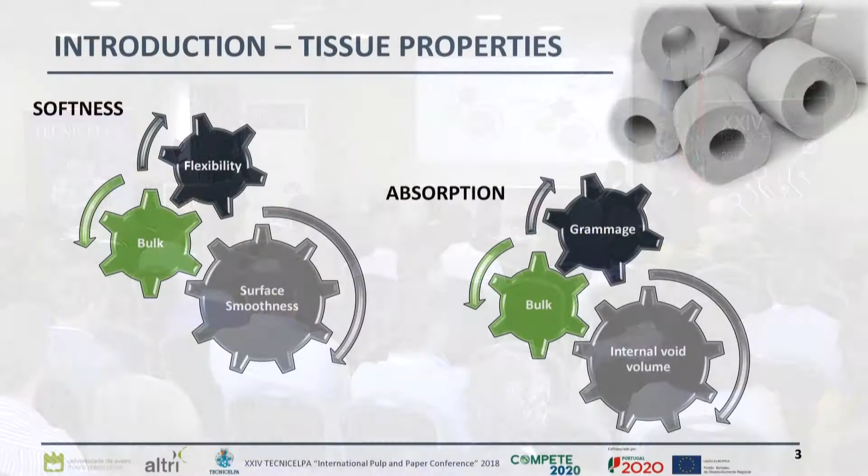Looking at these numbers, pulp industries are now pressed to improve and optimize their production processes in an economical, viable, and technologically feasible way. As a competitive area, the tissue market requires pulps with distinguished specifications, especially as regards absorption capacity and organoleptic properties such as softness. Softness is generally recognized as being comprised of two components, bulk and surface softness.

Surface softness is related to the smoothness, texture, and surface uniformity, and so it is very sensitive to protruding fibers or irregularities at the surface. Absorption capacity refers to the ability to absorb and retain water quickly, which is mainly dependent on the capacity to form hydrogen bonds by the surface hydroxyl groups of cellulose. It's directly impacted by sheet grammage, bulk, and internal void volume, as each void is a potential storage space for a liquid.

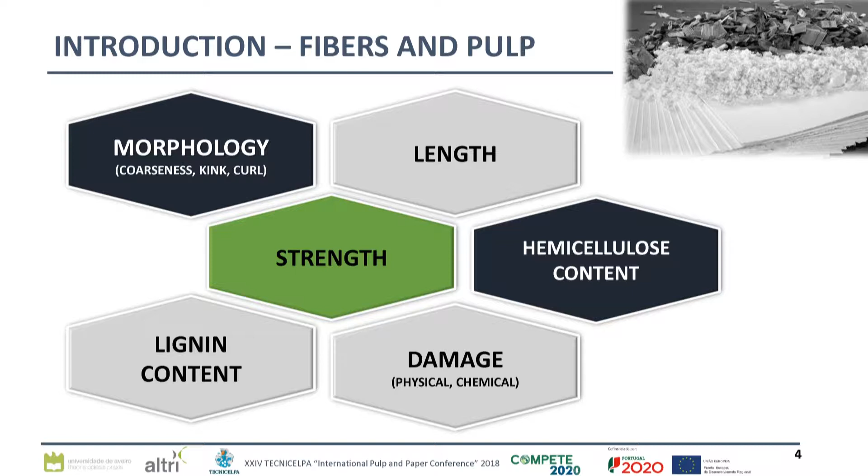Length, strength, lignin content, and physical and chemical damage of fibers are four wood characteristics known to have a strong impact on the tissue properties considered. Tissue producers also desire pulps with moderate intrinsic viscosity and low hemicellulose content. Low hemicellulose gives paper with a lower degree of hydration and is recognized as being one of the most important parameters in this case study. Coarseness, curl, and kink are three key morphological characteristics also known to have a strong impact on softness and absorption capacity.

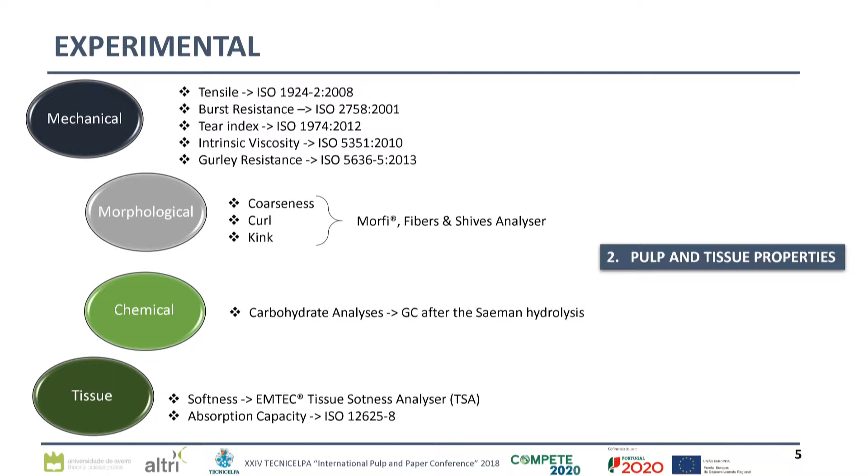So, in this work, aiming to evaluate the impact of some production factors on these two final tissue properties, a series of industrial pulps were first selected using multivariate statistics in order to ensure that the final properties would be significantly different. After this, the mechanical properties, morphological aspects, and chemical composition of these pulps were determined according to standard methods, and the softness and absorption capacity were determined using the EMTEC tissue softness analyzer, and the absorption capacity according to the ISO standard. Here it's important to note that softness and absorption capacity were determined by preparing laboratory handsheets, mimicking tissue papers of low grammage, approximately 20 grams per square meter.

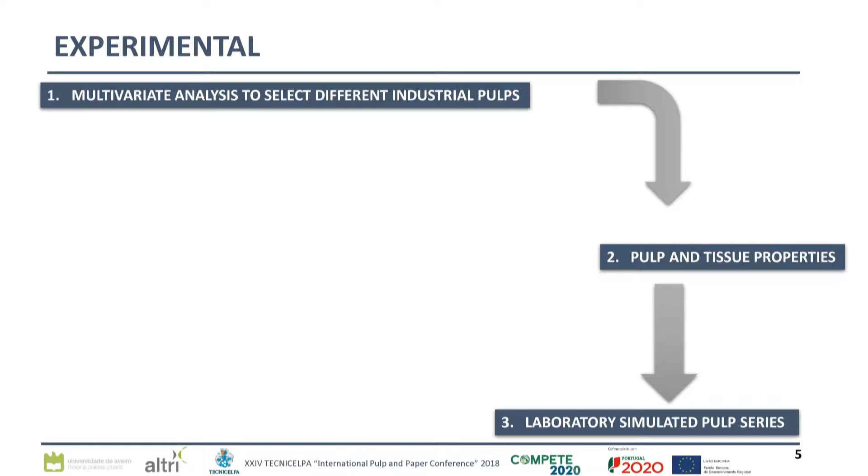After this, in order to confirm the relationships found for industrial pulps by multivariate statistics, some laboratory work was done, which comprised a cook and bleaching step. Eucalyptus wood chips were cooked in a dual vessel MK digester at a temperature of 160 degrees for 2 hours with similar sulfidity and hydromodulus 4, and for a range of different active alkali charges.

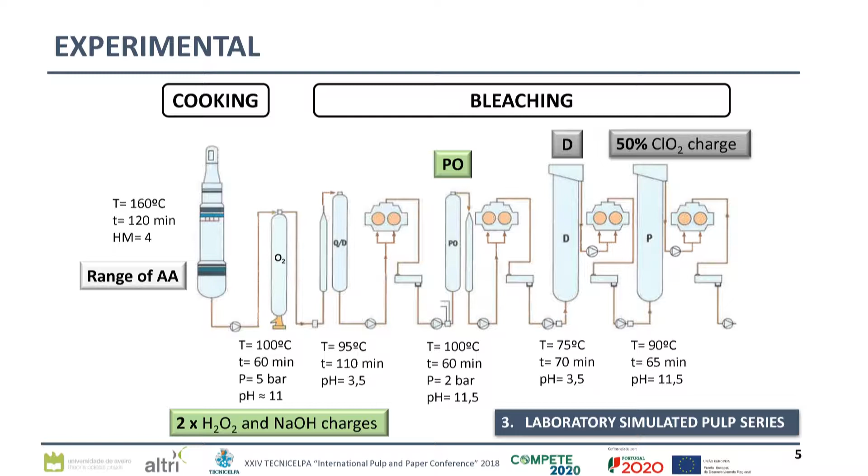Unbleached pulps were then submitted to oxygen delignification followed by 4 bleaching stages, 2 of them using chlorine dioxide, 1 with hydrogen peroxide and oxygen, and a final bleaching stage only with hydrogen peroxide. The modifications in bleaching sequences comprised an increase of 100% of hydrogen peroxide and sodium hydroxide charges in the PO stage, and another with an increase of 50% in chlorine dioxide charge in the final D stage.

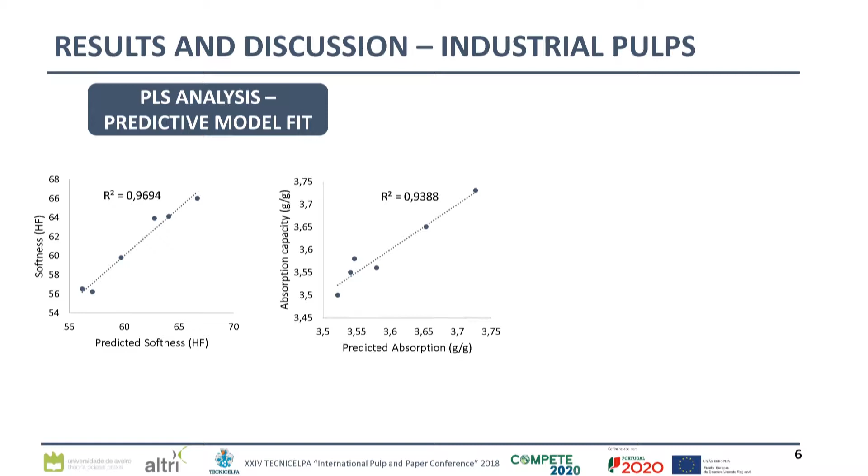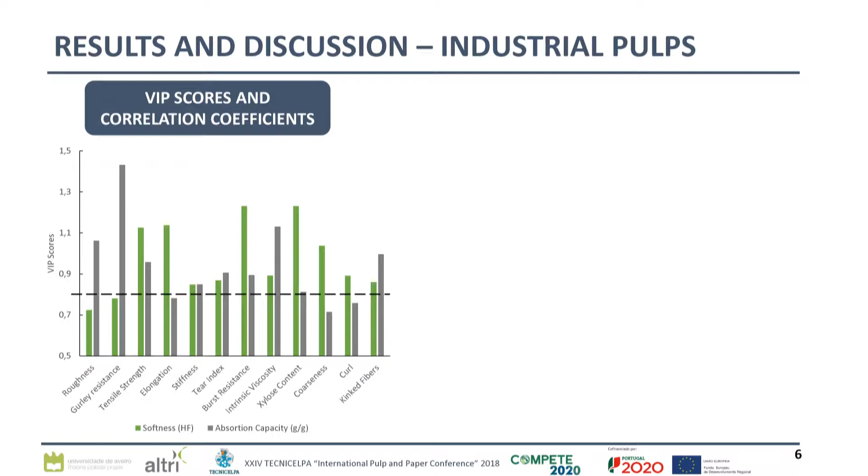A partial least squares analysis was performed in order to explain the maximum covariance of a matrix A containing softness and absorption capacity values by a matrix B containing the mechanical properties and the morphological aspects. As we see, trustworthy results were found because the decomposition of matrix B was then used to predict new values of A, and as shown, we obtain a correlation coefficient above 0.9 for the prediction of softness and absorption capacities. Generally, variable importance scores under 0.8 are considered low, which means that these variables don't have a strong impact on the prediction of new values of softness and absorption capacities.

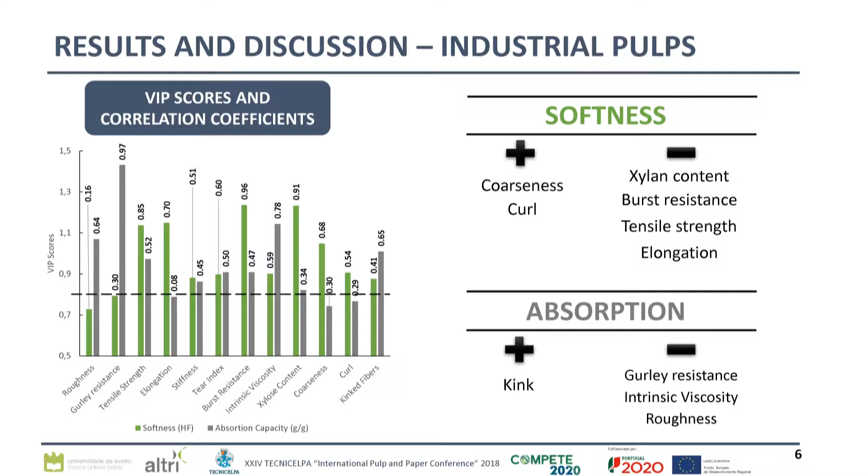Hence, the prediction of softness showed a negative correlation with the xylan content, with a correlation coefficient of 0.91, a negative correlation also with burst resistance, tensile strength, and elongation, and at the same time was positively correlated with coarseness and curl of fibers. Absorption capacity showed a negative correlation with the Gurley resistance, with a high correlation coefficient of 0.97, and a negative correlation with intrinsic viscosity and surface roughness. These tissue properties show a positive correlation with the kink index of fibers.

For laboratory-produced pulps, in general, the correlations found between tissue and pulp mechanical properties corroborated the conclusions drawn before by statistical analysis of industrial pulps, but a strong relation was also found between stiffness and softness, and between stiffness and absorption capacity. As stiffness is associated with the intensity of interfiber bonds, this negative correlation seems coherent, and for absorption capacity, for the same reason, softness was decreasing. As could be expected from these two trends, a positive correlation between softness and absorption capacity was confirmed with a correlation coefficient of 0.71.

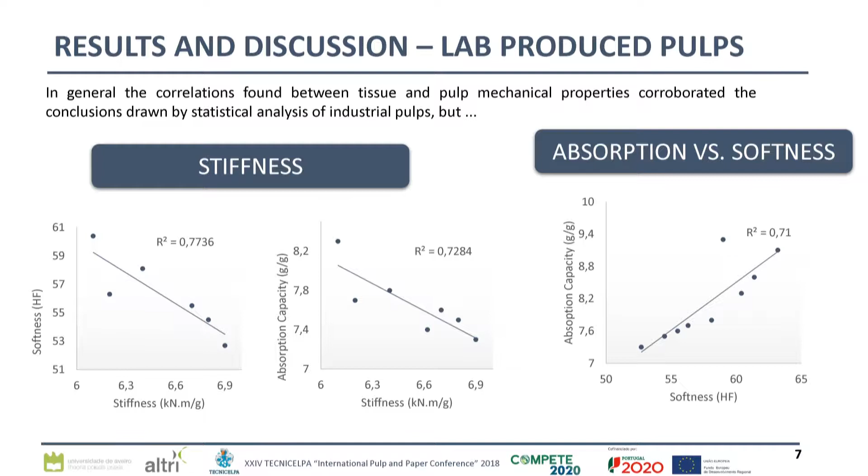Fixing the bleaching sequence, an increase of cooking severity led to a gain of almost 6 HF units in softness, with similar absorption capacities, which was accompanied by a maximum loss of 5.3% yield, a decrease of 2.4% in xylose content, substantial loss of intrinsic viscosity values, and lower hemicellulose content.

Fixing the cooking severity, modifying the bleaching sequence affected negatively both softness and absorption capacity. When compared to standard bleaching, for each cooking severity, softness dropped 3 to 5 HF units in modified PO and 5 to 6 HF units in modified D. Lower absorption capacities were found, as well as lower mechanical properties, with the modified PO stage being the one with the highest negative impact on the mechanical properties.

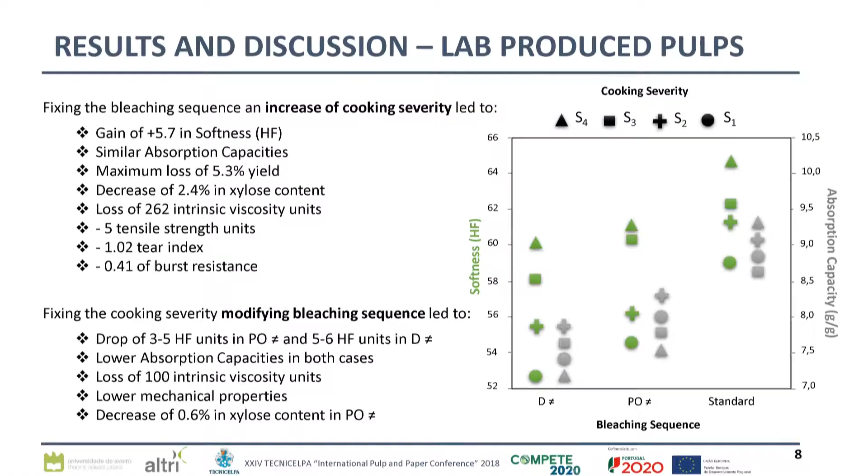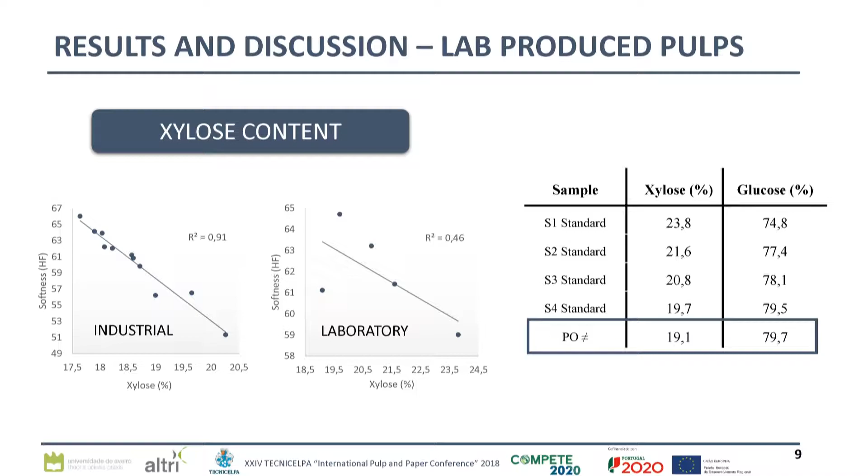This decrease of 0.6% in xylose content we'll talk about in the next slide. In relation with xylose content, and taking into consideration the correlations found before for both industrial and laboratory-produced pulps, the intention of modifying the PO stage was related to a better purification of the fiber surface and with the purpose to remove hemicelluloses extensively. However, although the xylose percentage in modified PO effectively decreased, no improvement in softness was detected.

In short, with this work we conclude that eucalyptus bleached kraft pulps have a significant effect on these tissue properties. Softness of ECF pulps was negatively influenced by xylan content and pulp strength properties. Absorption capacity showed high negative correlation with Gurley resistance, surface roughness, and intrinsic viscosity of industrial pulps. The relationships found for laboratory-produced pulps corroborated the conclusions drawn from industrial ones, and also showed a clear trend of softness and absorption to increase with the decreasing of handsheet stiffness.

Severity of laboratory cook revealed an increase of softness and similar absorption values. Pulps showing better softness also revealed better absorption. Increase of reagent charges in the bleaching stage affected negatively both softness and absorption values. And last but not least, xylan removal or polysaccharides degradation in pulping and bleaching operations leads to a different effect on softness and absorption capacity.

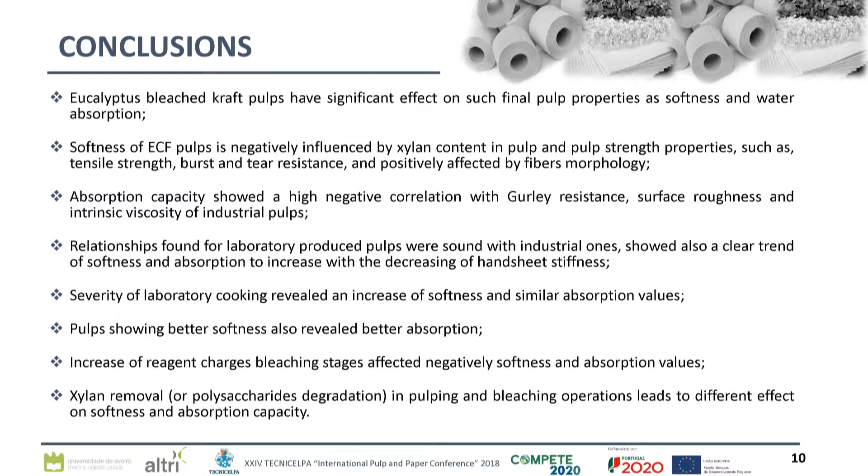I'm very glad to be back in Portugal. Even though I'm based in Sweden, I have traveled quite extensively in Portugal previously. It's a lovely country, really. And in fact, my first business trip went to Portugal in 1987 when we introduced the first Kappa number analyzer.

I will do this presentation together with my colleague, Renato, from our branch in Brazil. I would also like to thank Mr. Andreas Wikström from SCA Obbola Mill, where this example is taken from. He has also contributed to the paper.

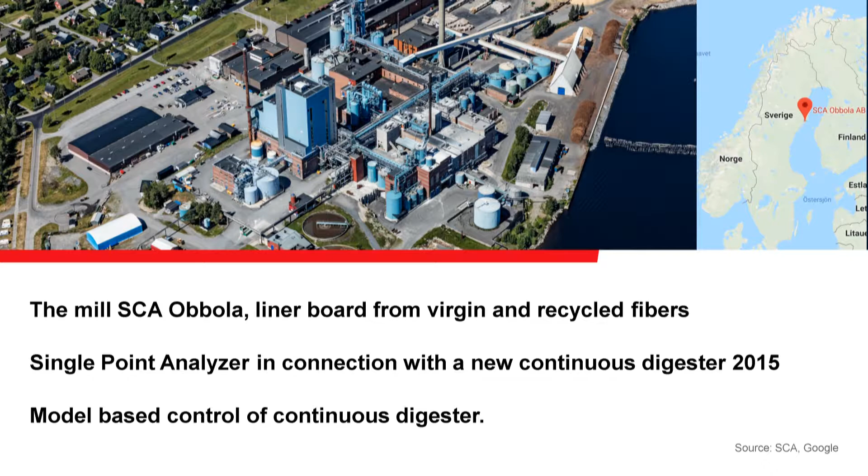So SCA Obbola Mill is based in the northern part of Sweden, close to the coast. The nearest city is Umeå. And it's a high-yield mill. They make linerboard, with a Kappa number target around 80. And they invested in a new continuous digester in 2015 from a Swedish supplier. And the second part of the paper, which Renato will do, is about the possibilities of even further increasing the yield and the pulp quality using model-based advanced process control.

So this mill had a batch digester plant, built in the 1960s. In 2015, they tore down the old batch plant, and they put in a new continuous digester. They produce around 260,000 tons yearly, but the nominal capacity is much more. The reason for that deviation is that they are preparing for a new investment, a new board machine, and the extra capacity will be utilized. So they are producing virgin pulp. They are also producing recycled pulp for the liner.

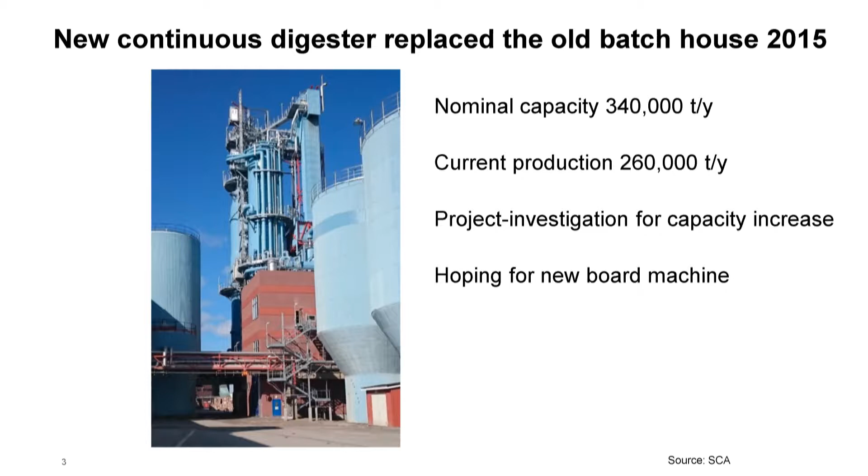So now I will start to talk about the first challenge in this project, control-wise, and that was to even be able to measure the kappa number. Because you have the new continuous digester from a Swedish supplier. It is equipped with a control system, H-factor supervisory-based control. And what they lacked to stabilize the kappa number and to increase the yield was a continuous kappa number measurement close to the digester. Because you need that feedback signal in order to control the continuous digester to the desired kappa number.

The challenge in this case was that the refiner is located far away downstream. So it's a matter of more than an hour between the refiner and the digester. And the challenge was to try to minimize that time.

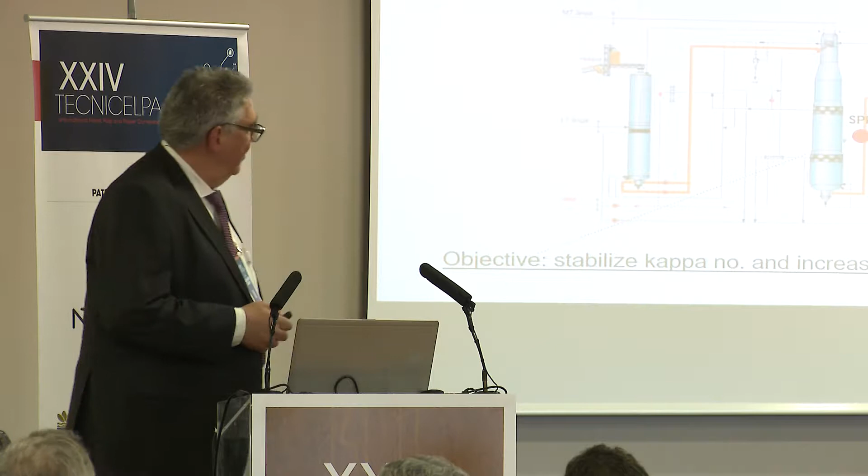And the only possibility was to put the analyzer, the automatic kappa number analyzer, in the blow line. And one has to remember at this point, the pulp is not really defibrated. It's more chips than pulp. So that was the challenge.

So this is taken from the internal screen system that is integrated in the analyzer. You can see the reject from the analyzer and the accept. And since all automatic kappa number analyzers are based on optical features, the absorption of ultraviolet light, it means that we cannot measure on big pieces of chips. We need free fibers. And the amount of free fibers is very small compared to the reject. So that was really the challenge.

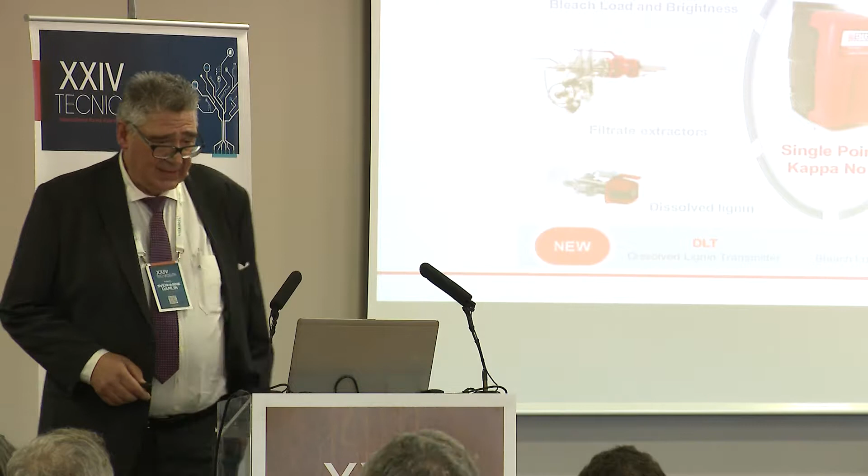And what we used was this SPK, the single point kappa number analyzer. It's measuring the fiber kappa. It can also measure hexenuronic acids, and you also get a fiber length index. It's a part of a new family of tools that we have to control and optimize the fiber line. So we use this one on the brown side, digester and oxygen stage. We are using other tools in the bleach plant where we can measure all lignin in the fiber line: fiber-based lignin, filtrate-based dissolved lignin, COD, in order to optimize a complete fiber line. In this case, there was no bleach plant, so only this one was needed.

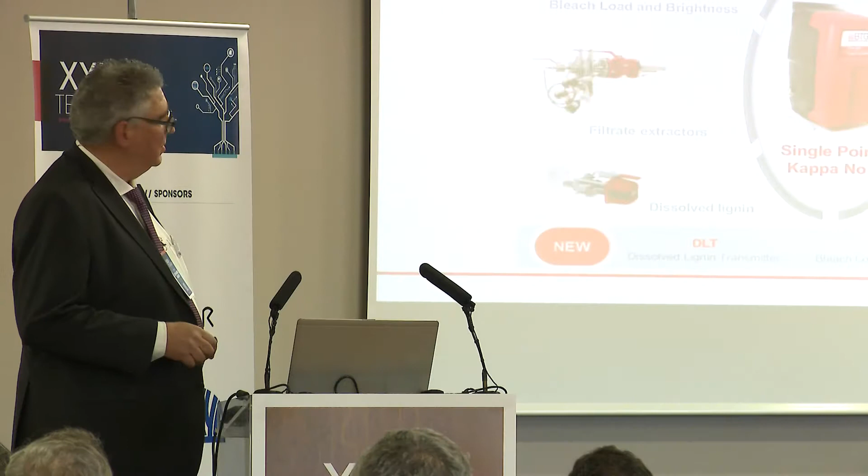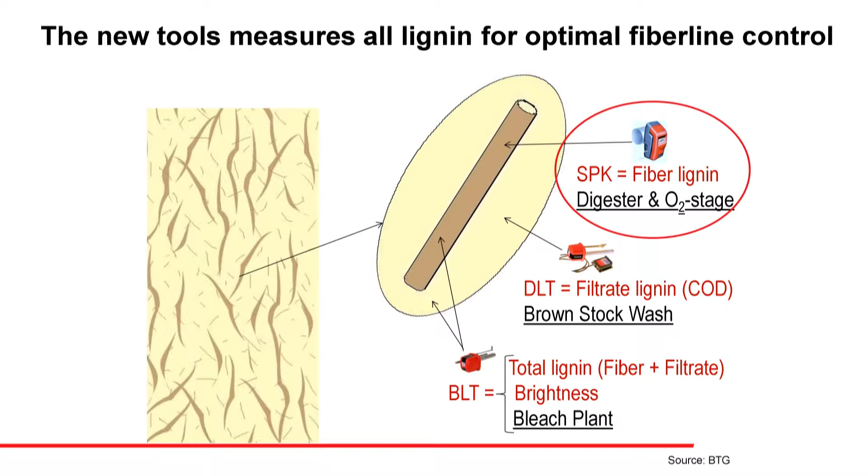So this is how it looks. We are using the single point kappa number analyzer to measure the lignin content of the fiber. We have other tools to measure the dissolved lignin in the filtrate, and also the total kappa number, fiber plus filtrate, together with brightness. That is used to optimize a brown stock wash and to optimize a bleach plant. But in this case, what we used was this tool, measuring the lignin content of the fiber.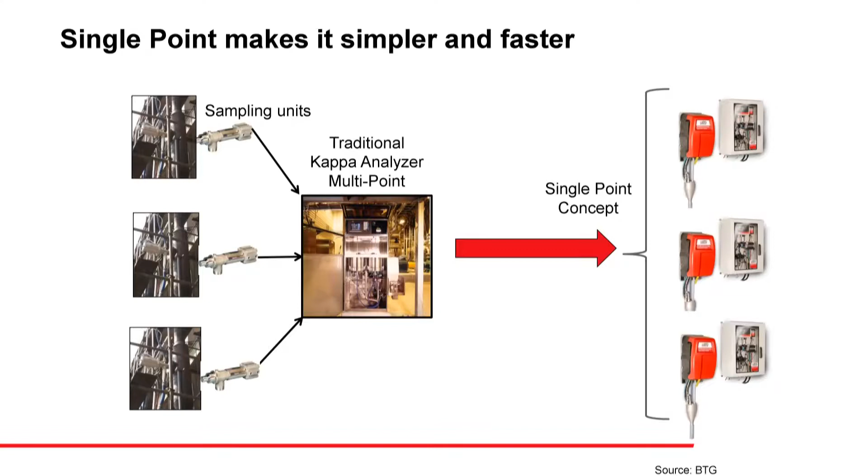So we went from this technology. This was the one that I mentioned I was introducing back in 1987, the first automatic kappa number analyzer. It's a central unit where you take samples and you transport the samples to the central unit. What we have done now is that we have simplified that technology from this complex system into this simpler, easier to handle system. So you use one analyzer for each measuring point. And actually I am still holding the patent for this measuring technology that we introduced in 1987.

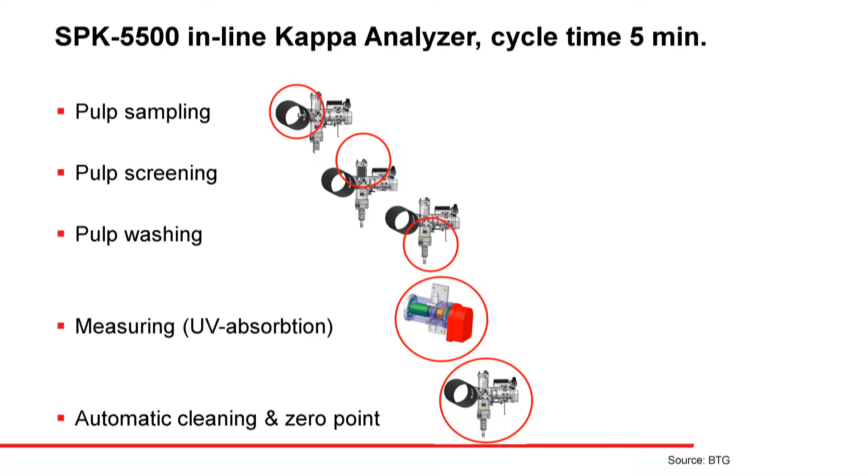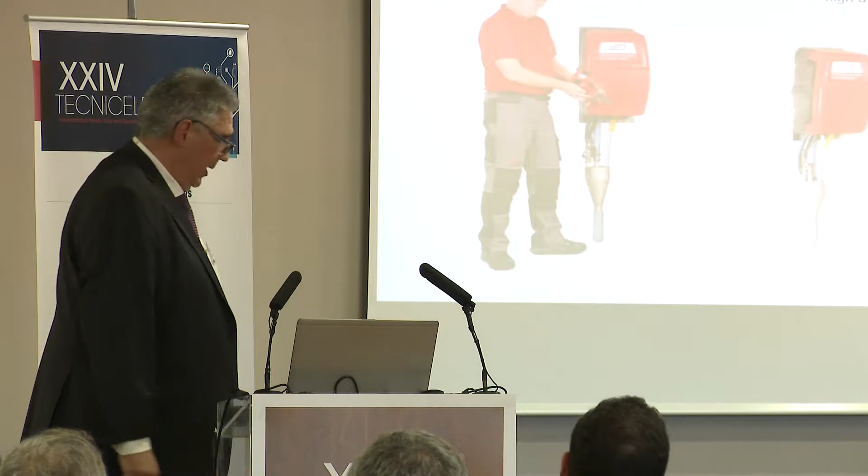So the analyzer is mounted directly on the blow line in this case. So this is the blow line. It takes a sample, it screens, washes, measures, and cleans, all in one. No piping, no extra sampling valves. It's integrated in one unit. This is how it looks. This is the product manager, actually, for the unit. So this is to give you a feeling for the size. You can actually handle it by yourself. You can really carry it yourself.

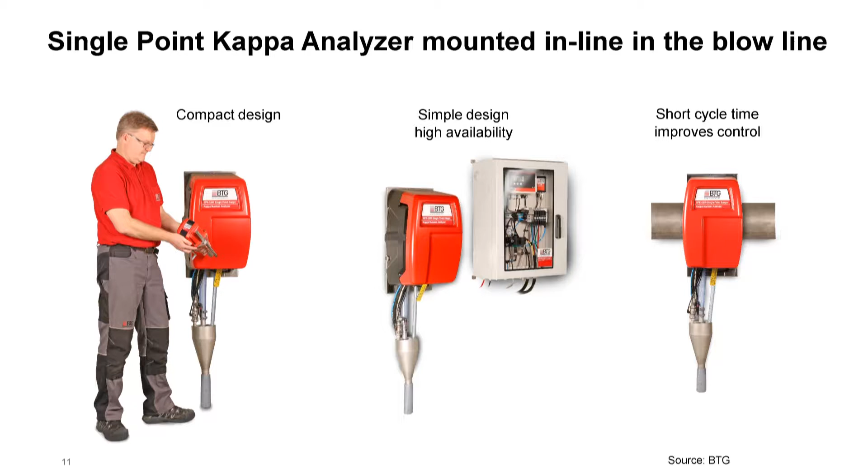So this is the unit with the sampler built in, and the sample handling, and this is the control unit. And the benefits are that it's easy to handle, simple, few components, has a high availability, and a very fast cycle time. It measures every 5 minutes.

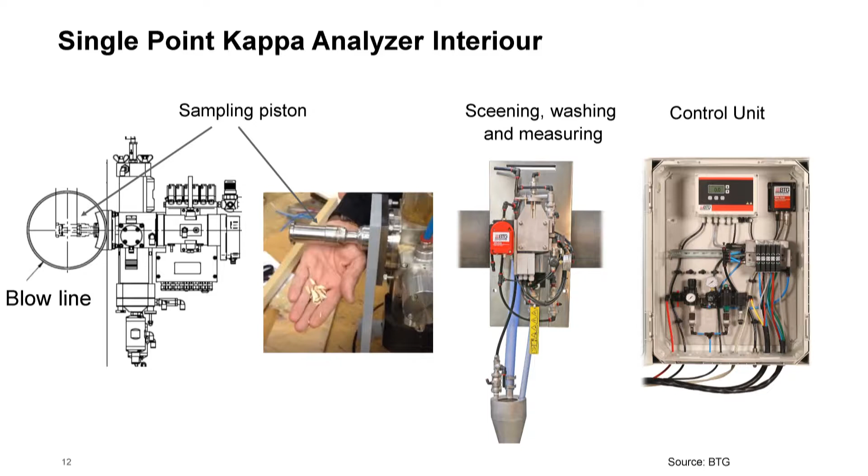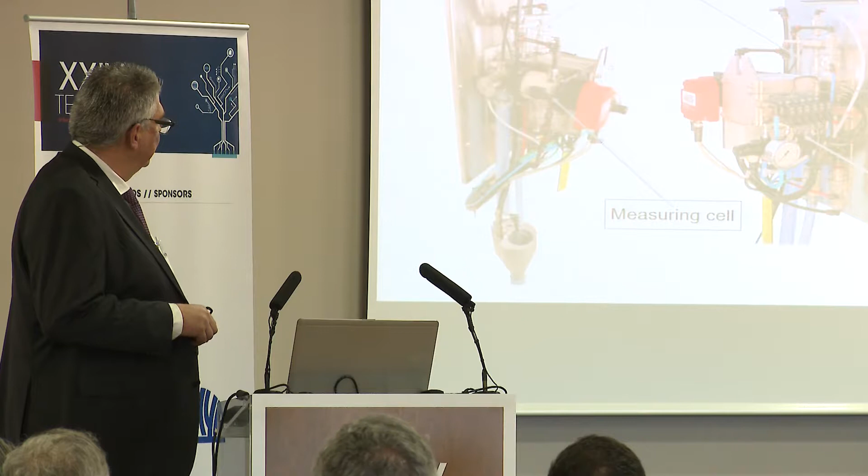So this is how it looks internally. You have the blow line, you have the sampling valve, and you have the drive unit. So this is the sampling valve. This is where the sample is collected. And you have the drive cylinder, and you have the control unit. You can see it here. And this is where the screening is taking place, the measuring, the washing. This is the drive cylinder, and this is the screen unit from another angle. So this is how it looks in the mill, bolted directly onto the blow line.

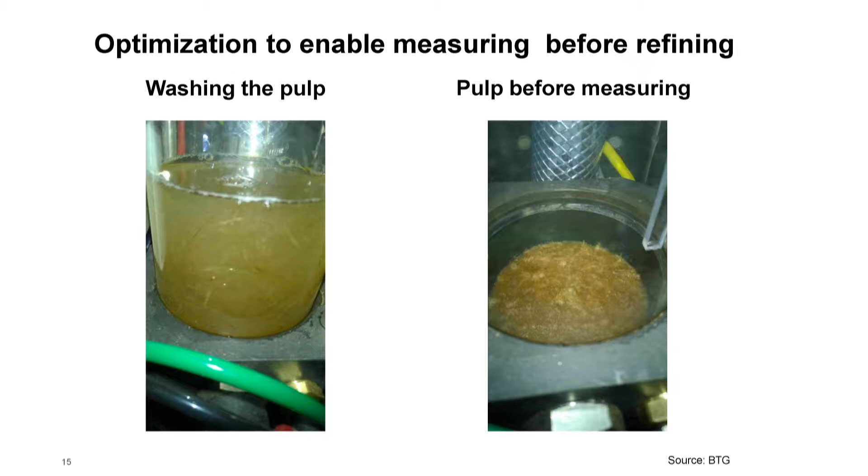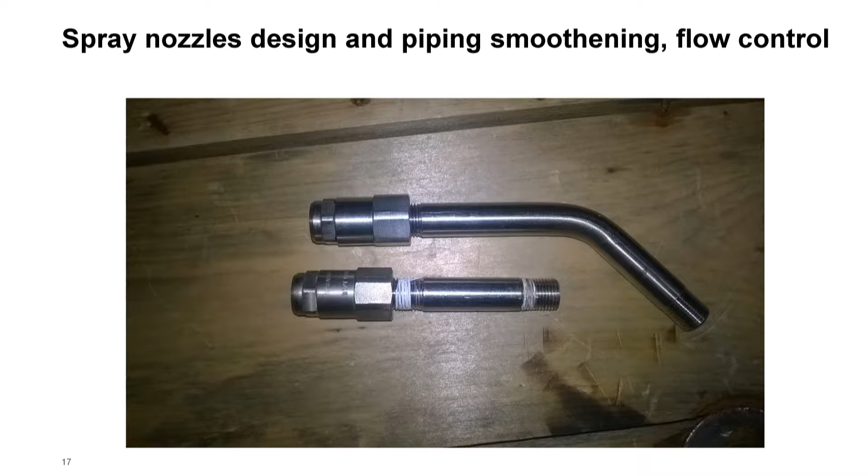This is how it looks during the measuring cycle. It's a little bit low resolution, but you can see that there are quite some chips still in that pulp, but it's possible to measure. And what we did, considering this situation that we have with a high level of reject and very few free fibers, what it is all about is to optimize the internals of that analyzer. It's very similar to optimizing a screen basket, for instance. You have to control the wire mesh, you have to control the flow, the directions that the fibers are coming in the flow. It's a little like floating timber. You want the fiber to come with a sharp end first, not to get clogged in the system. So it's about optimizing a lot of water nozzles. The bends should have a certain angle, a certain radius. So it's small things, but very important things, because if you don't do that, you cannot measure, and you lose the measurement completely.

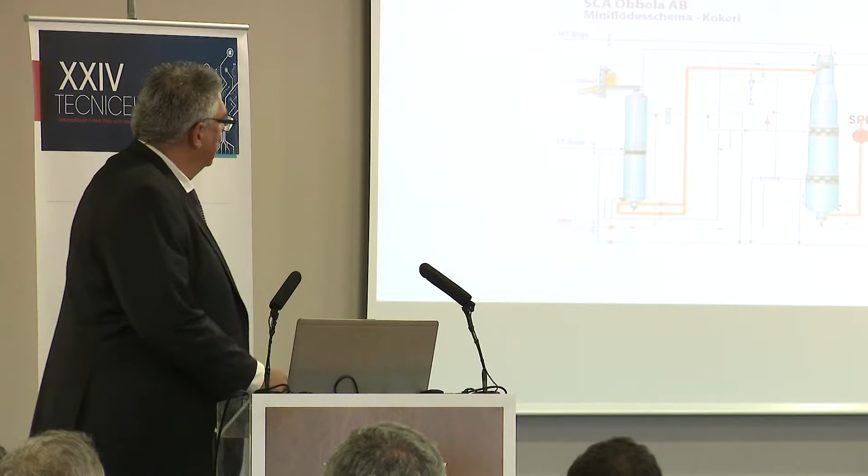So what we have today is that it has been mounted here for more than 2 years. The maintenance is, we have a service contract, so we service it 4 times per year. The mill does not do anything extra, so we come every quarter to do a service. And it has been providing an accurate feedback signal to the supervisory system of the digester.

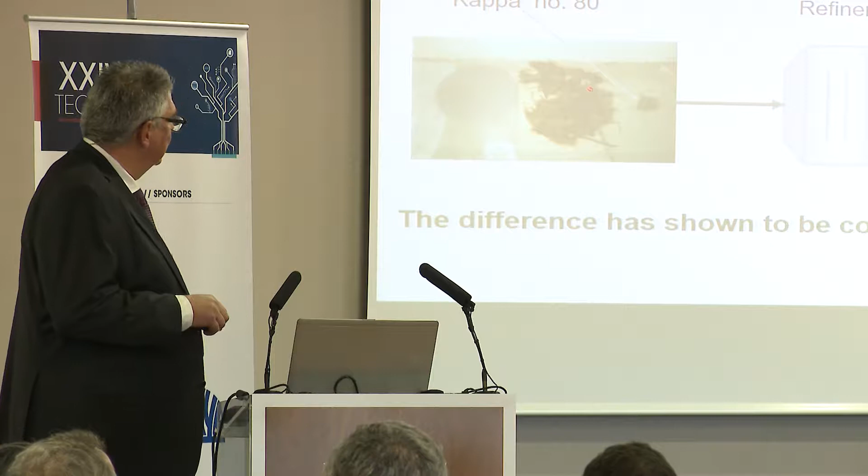And what one has to consider also when doing a project like this is that since the refiner is downstream, there is one factor to be taken into consideration, and that is that this reject, shives, knots, pieces of chips, have a higher average kappa number, lignin content, compared to the free fibers. So when they are passing the refiner, the average kappa number of that pulp is really increasing, because you have a lot of unreleased lignin that is freed when you pass the refiner.

So when we measure with the kappa number analyzer, it's around 80. After the refiner, it's 83. This has been shown to be very constant, so it can be handled with an offset. So it has not been an issue in this case.

So the result is that the mill, using that simple technology with the feedback, they have been able to increase the average kappa number at least 1 unit. And 1 unit doesn't sound a lot if it's 80 or 81, but it means a lot of money, actually. Because if you increase the kappa number by 1 unit, you increase the yield calculated on the wood consumption by 0.3%. In production, that is 0.6%, because the wood consumption is 2 times the pulp production.

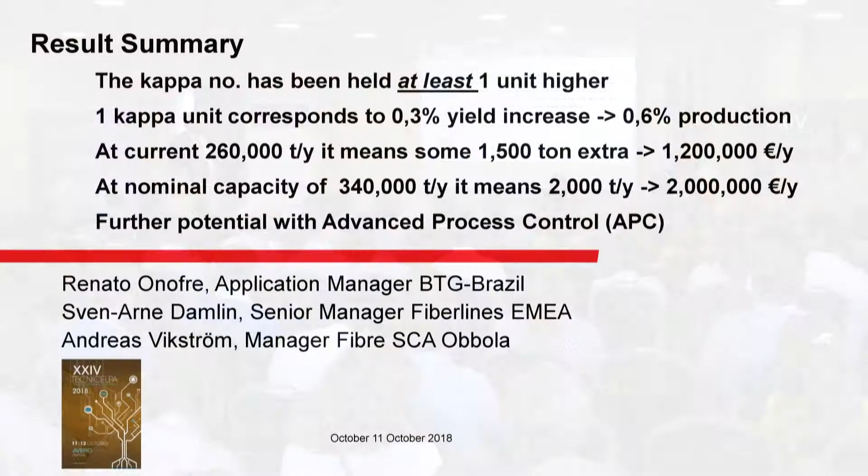So at the current production rate, it means more than €1 million extra per year, calculating on normal, or actually got pretty low market price for the pulp. At the nominal capacity, it means around 2 million.

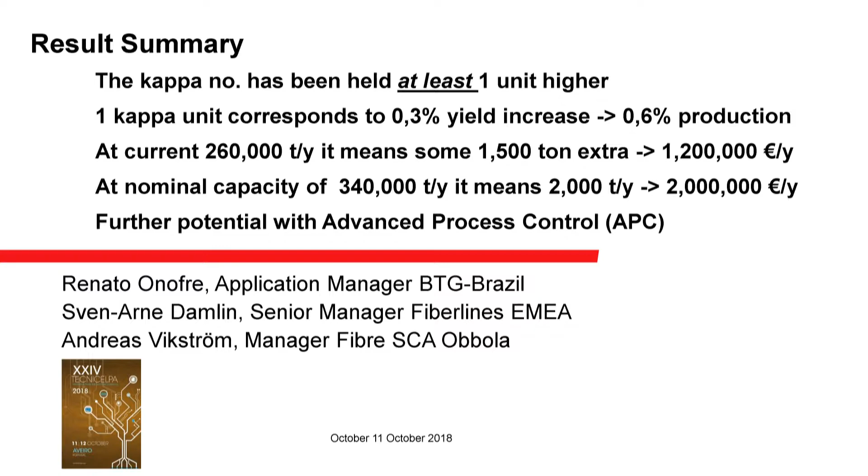And this has been done only with the signal from the kappa number analyzer. We are very sure that there is much more further potential if you can use an intelligent, advanced, model-based process control on top of that existing supervisory system. And that is what my colleague Renato will discuss.

So please, Renato. Good afternoon. My name is Renato Onofre from Brazil. My idea was to present this in Portuguese, in Brazilian Portuguese, of course, but let's go to in English, no problem.

So I'm going to complement the presentation from Sven Arne showing some ideas on how we could improve the process using advanced process control and real-time optimization. I know that time is now a little short, so I will try to be as fast as possible in here.

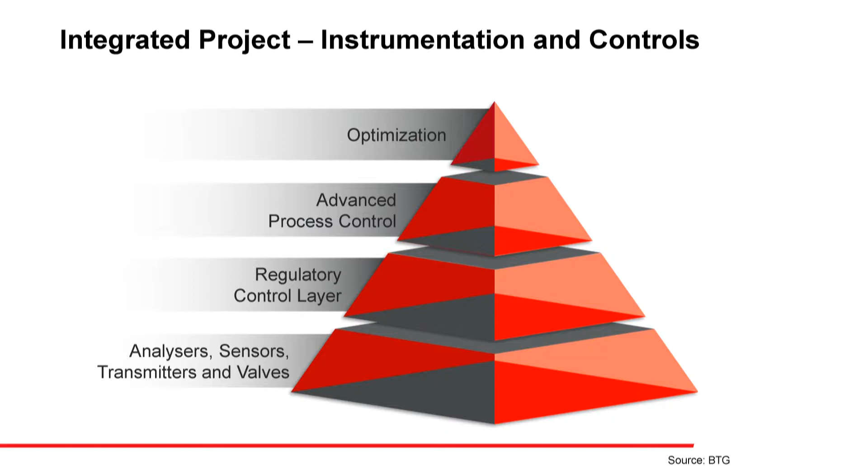So first of all, I'd like to show you a traditional instrumentation and controls pyramid, where we have at the bottom the analyzers, like the kappa analyzer Sven Arne presented, sensors, transmitters, like temperature transmitters in a cooking plant, and control valves. And on top of that, we have the real optimization. The intermediate layers, we have a regulatory control layer, like the DCS, and we have also another layer which is called advanced process control. What's the difference between this layer and this one? Basically, optimization has a cost function on it. So we optimize the process and drive it to achieve the best result as possible in terms of cost, production, whatever we want to achieve.

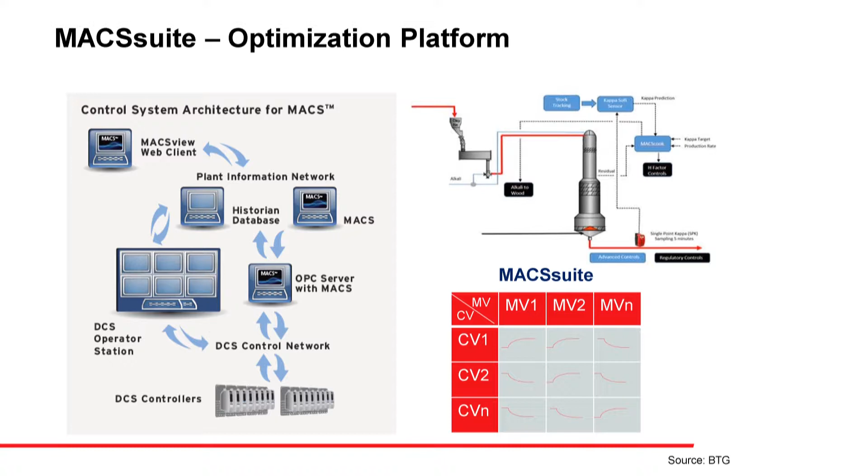Basically, some process changes are done, or the bump tests are done, so that we can build those models and based on that optimize the whole process. And it's my time, sorry about that. I'm going to be a little further in here.

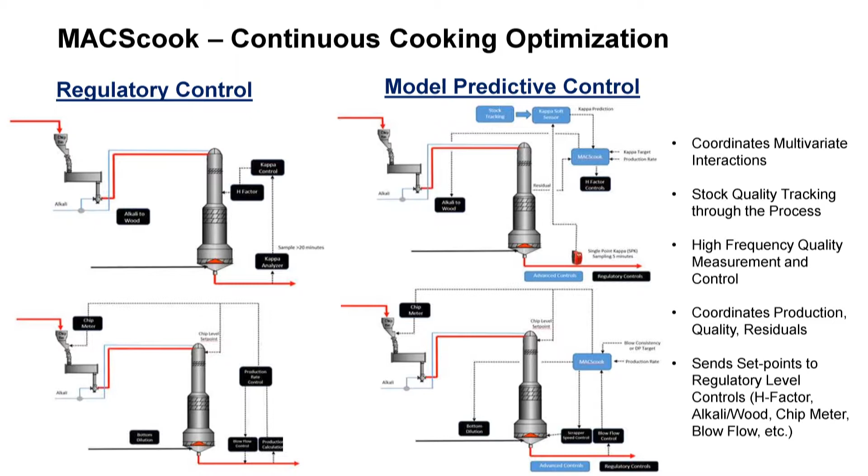Another comparison between a regulatory control and MPC, it's a little small here, but a traditional regulatory control system uses the kappa information into a block and then to H factor on the digester. You can see that the alkali ratio is not used in this case. In an MPC, much more information is used to optimize the process. So for instance, we can combine the kappa analyzer with retention times in the digester. We can build soft sensors that will, inside a block, define the H factor and the alkali charge in different positions of the digester. So the complexity here is much more compared to this one. And of course, the end result is much better.

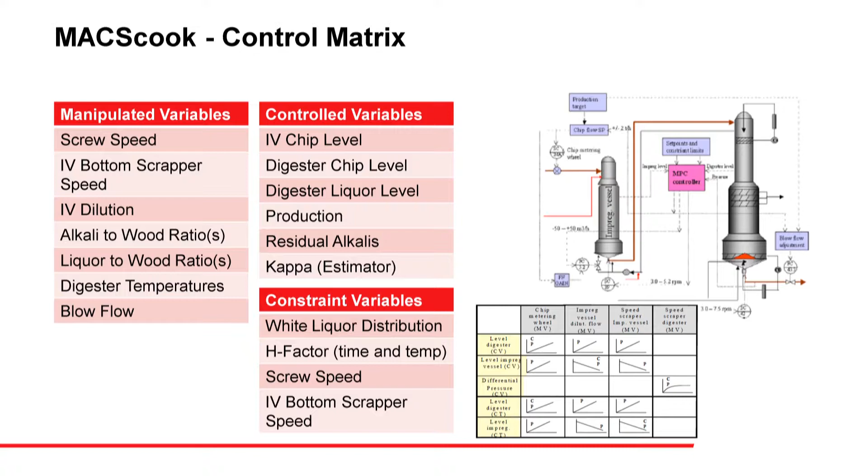Here's just an example of a control matrix that we can develop during an optimization project, where we have some manipulated variables, controlled variables, and constraint variables, which limit the control action. In general, as manipulated variables, we can use the screw speeds in an IV and digester, the alkali ratios, liquor ratios, all the temperatures, and the blow flow. We manipulate those variables to achieve process stabilization in terms of controlled variables. So act here and control this one.

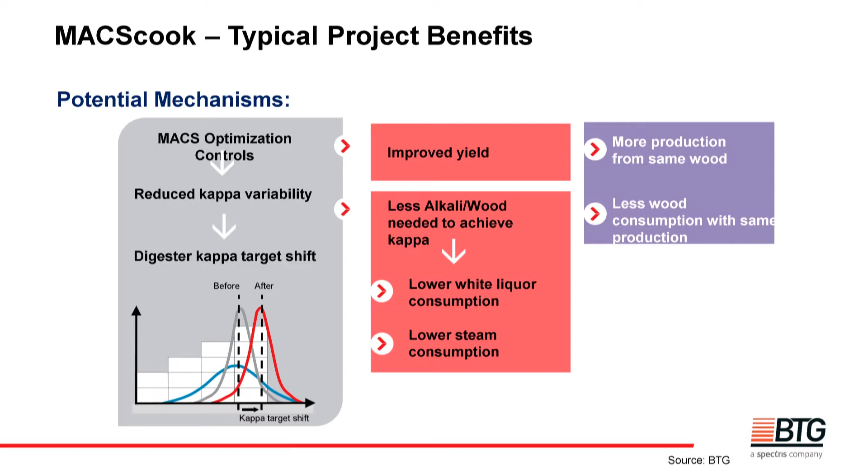Good afternoon, Pedro Matos Silva. Two questions, one for each. What is the range of kappa number where we can apply this new technology? You mentioned this experience at the 80 level, but can we use it at very much lower levels of kappa with the same accuracy? And the second question for the other colleague: these models can also be used with other technologies, I suppose. So with the kappa analyzer like we have today, we can use these predictive models to apply them with the same results, I suppose.

Yes, thanks. I can answer the first question. The nominal range is from kappa number 2 to 120. The issue when measuring with this technology is not really the kappa number itself, it's that we have to get enough free fibers. So the lignin content is not the big issue. The issue is to free the fibers so that we can measure the lignin. But the nominal range is from kappa number 2 to 120.

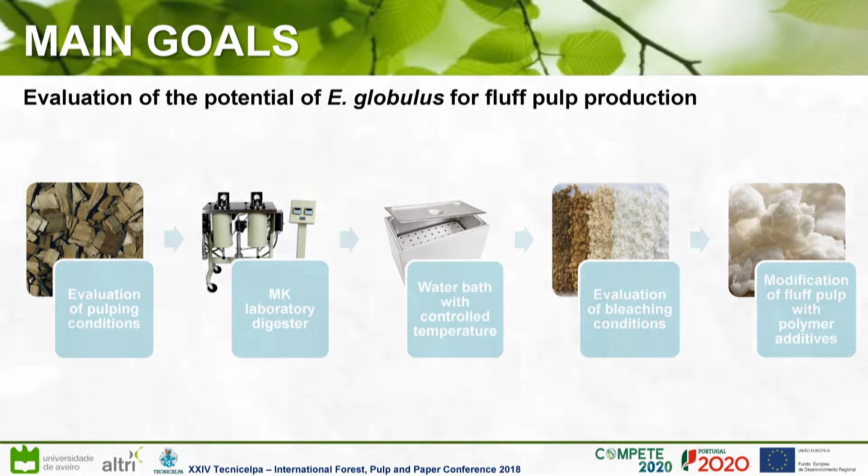So the main goal at the beginning is to evaluate the potential of Eucalyptus globulus for fluff pulp production. The methodology will be to evaluate the chips, of course. We will cook in the MK laboratory digester with different pulping conditions, then oxygen delignification, and then evaluate all of the bleaching sequences. And of course, at the end, try to modify or transform the fluff pulp with biopolymers or additives.

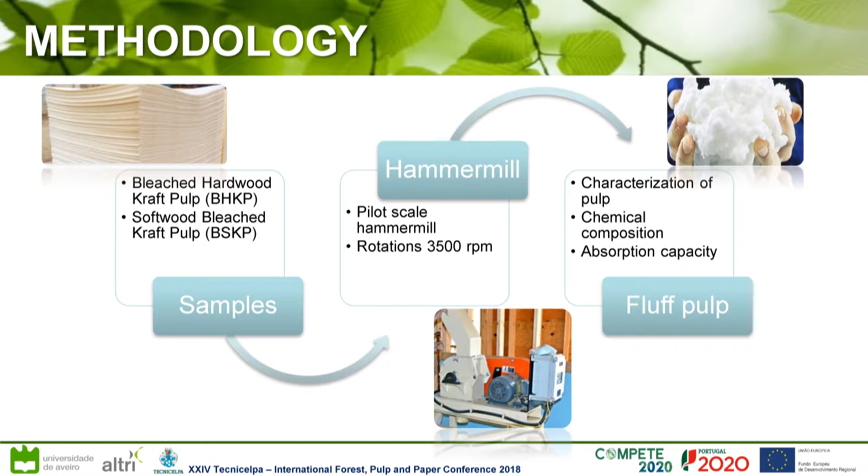So in this work, we started with bleached hardwood kraft pulp and softwood bleached kraft pulp as prepared. And they were the samples. These samples were turned into small pieces and then introduced in the pilot scale hammer mill with a constant velocity of 3,500 rotations per minute. So at the end, we have a kind of material that was called the fluff, and then we analyzed the chemical and physical properties and, of course, the absorption capacity.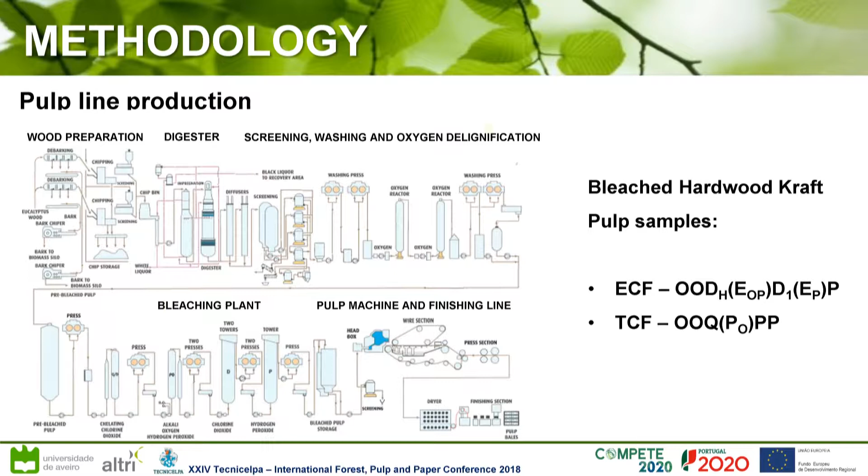So this pulp, the bleached hardwood kraft pulp, is from Celbi. I show you here, of course, the pulp line production: wood preparation, digester, screening, washing and oxygen delignification, bleaching plant, pulp machine and the finishing line. So all the pulp was collected here, and the pulp samples were bleached with two different sequences. We have the elemental chlorine-free and the total chlorine-free. The difference, of course, is that it doesn't have the chlorine dioxide, and has a chelating stage before the peroxide stage.

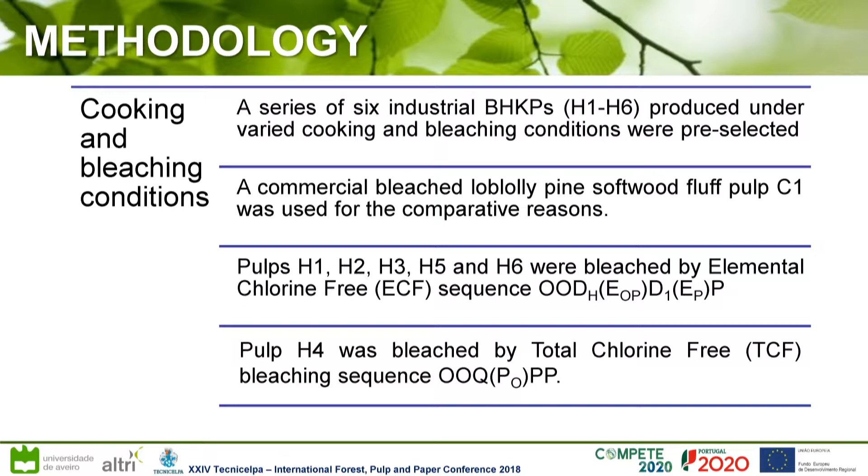So the cooking and bleaching conditions. A series of 6 industrial pulps produced from hardwood were selected, and we pre-selected them because we tried to pick different extreme conditions of pulping and bleaching. And of course, to have a comparative way, we chose a commercial bleached loblolly pine softwood fluff pulp that we call C1, that is used to produce fluff pulp. So the pulps H1 to H6, except H4, were bleached by elemental chlorine-free, and the pulp H4 was bleached by total chlorine-free. Regarding the commercial bleached loblolly pine, we didn't have enough information about the pulping and the bleaching conditions.

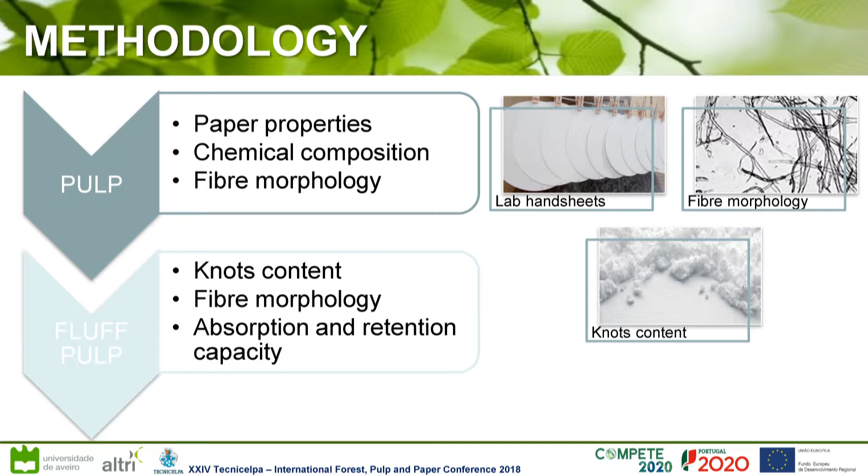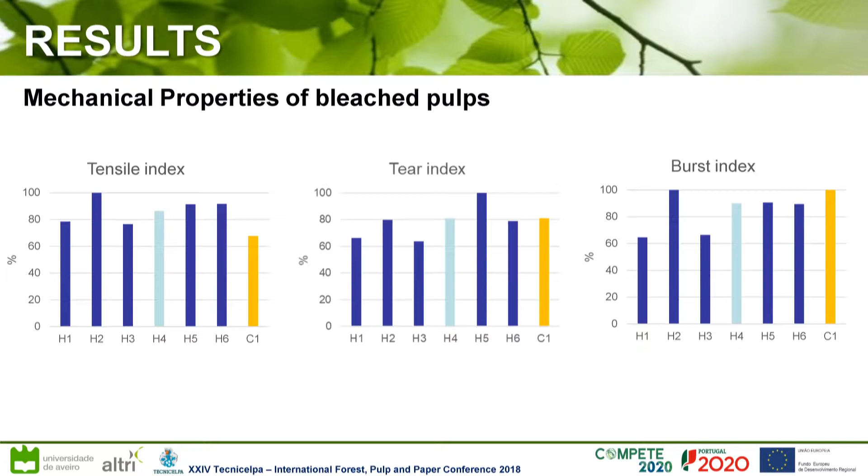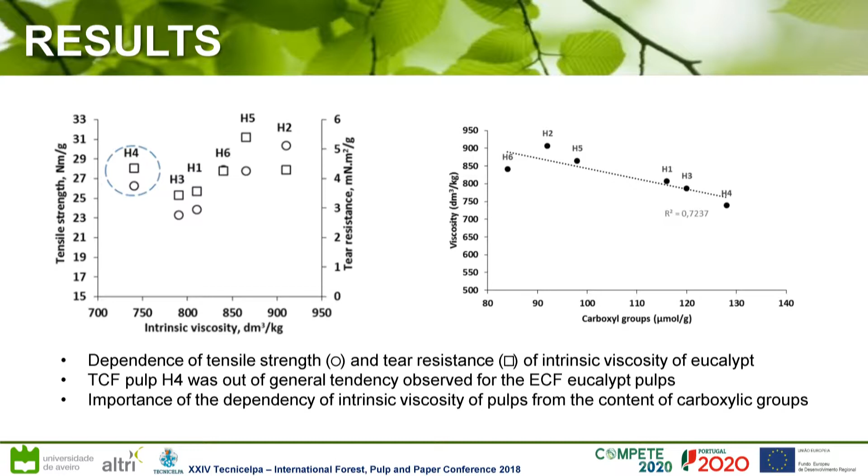So, in this slide, I have these two figures. We can see in these figures the dependence of the tensile strength and the tear resistance on the viscosity of the eucalypt pulps. And what we can see is that the TCF pulp H4 is out of the tendency observed for the other pulps. Probably most of these variations are due to the different degree of polysaccharide degradation during the pulping and bleaching conditions, and of course because this is a TCF pulp, we have the last oxidative stage that has done the depolymerization of the polysaccharides. And in this picture, you can see the importance of the dependency of the viscosity of pulps on the content of carboxyl groups.

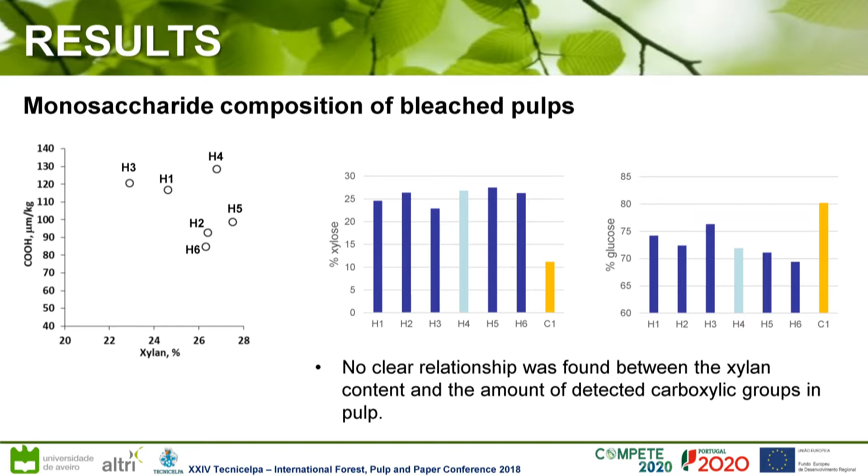Regarding the neutral sugars, we have done a characterization, and we didn't find a clear relationship between the xylan content and the amount of the detected carboxyl groups in pulps. And this can be explained probably by the importance of the oxidative bleaching stage, that is the O stage, and the peroxide stage in the formation of the carboxyl groups. So those slides that I showed you were about the bleached pulp before the defibrillation in the pilot scale hammer mill. So then we compared after the defibrillation with the pilot scale hammer mill, and we have done the fiber morphology that is very important to the fluff pulp, especially the form and the structure of the fibers, because of how much they can hold the water. It's a very important parameter.

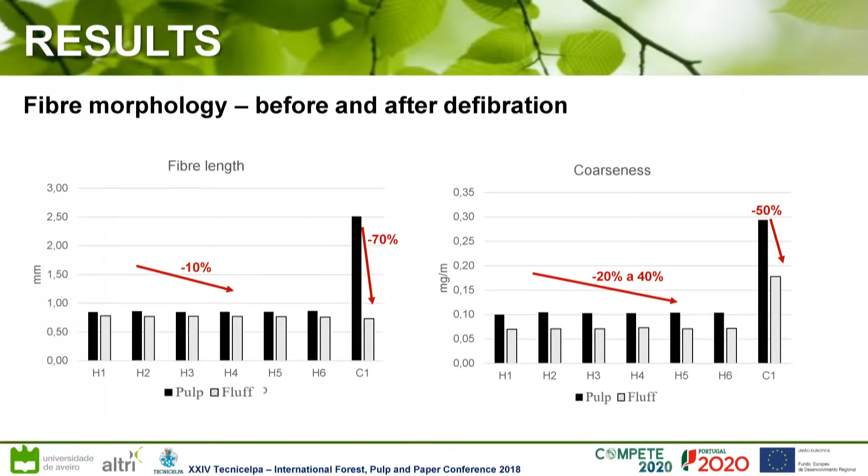So as we can see here, the kraft hardwood pulp has just a loss of around 10%. And then the loblolly pine, the softwood, has around 70%. And this could be explained especially by the high intensity of the defibration, because we used a constant rate of speed that I already told you about, 3,500 rotations per minute. Probably this pulp could be defibrated with just 2,000 rotations per minute. That's why we saw a huge loss in the fiber length. And of course, we saw a loss in the coarseness and an increase in the kink and torsions. It was expectable because of the mechanical action of the hammer mill, and a huge increase in the fines content.

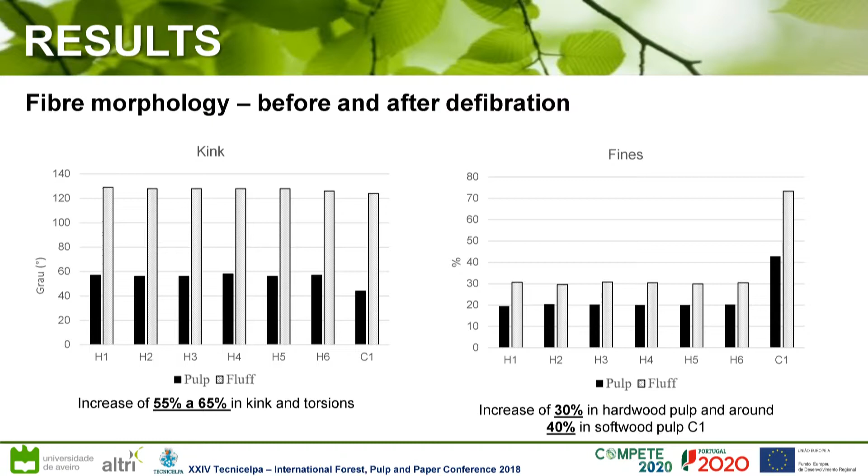The density of the sheets was higher in the hardwood kraft pulp, and was like half in the softwood pulp. And what we consider here as knots content was the part that was retained in this mesh that was around 12 millimeters.

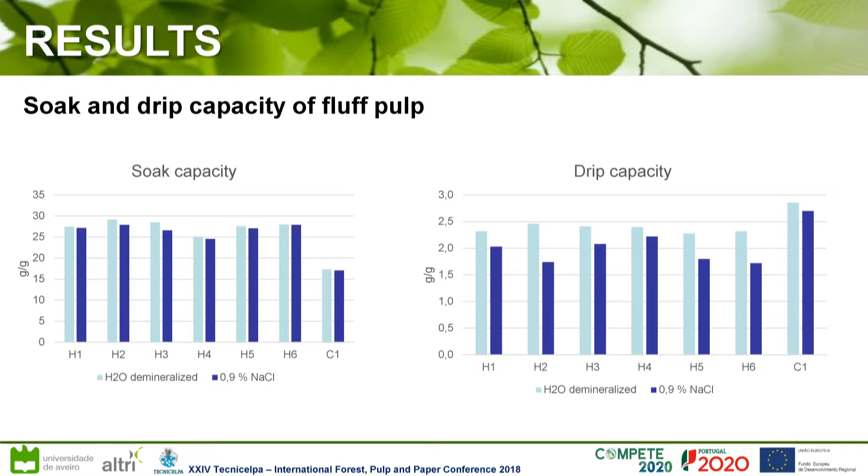Regarding the soak and drip capacity, we have very interesting results in the soak capacity, because we see here that the kraft hardwood pulp has a higher soak capacity than the softwood pulp. However, in the drip capacity, the softwood pulp has better results. This drip capacity is a water retention value, but not the ability. It doesn't measure the ability of the swelling of the fibers. It's just a retention capacity.

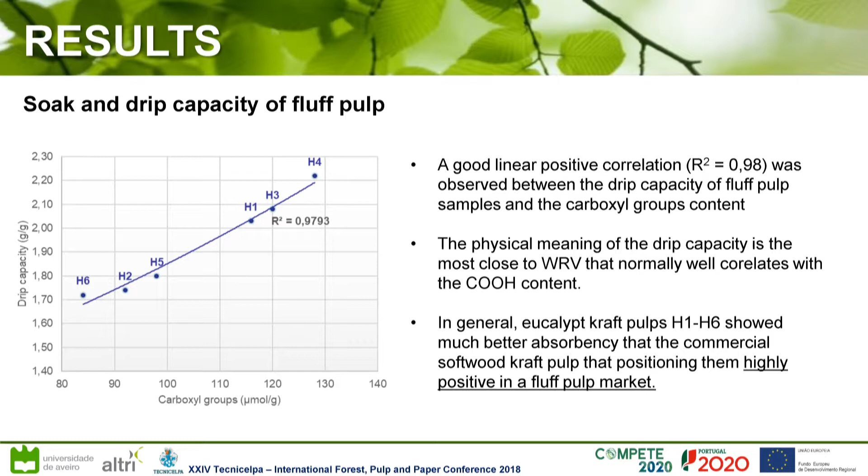And at the end, we could find a very interesting relationship between the retention capacity and the carboxyl groups. And of course, this is interesting because the retention capacity is the closest to the water retention value that, of course, correlates very well with the carboxyl group. So this is a very interesting correlation that we found. And of course, it's a huge advantage that the eucalypt kraft pulps have much better absorbency than the commercial softwood pulp.

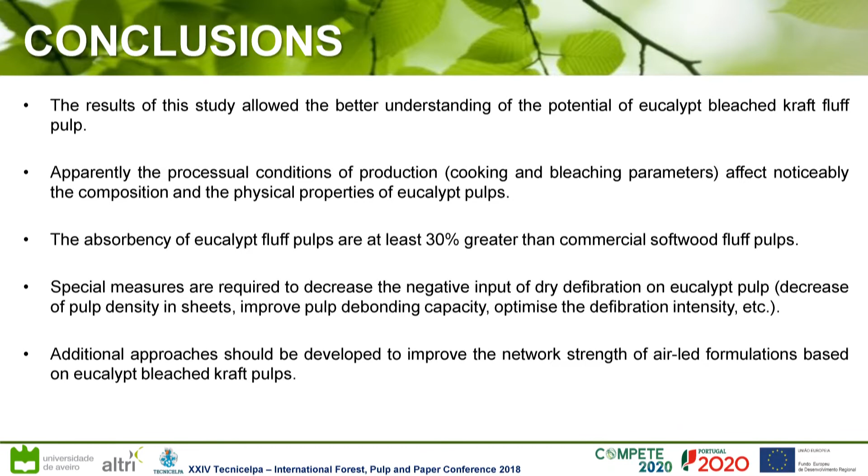So as conclusions, with this study, the results were very interesting to understand and to evaluate the potential of the Eucalyptus globulus to produce this kind of material. Of course, the cooking and bleaching conditions will affect the production of this kind of pulp. A very interesting result is that the absorbency of eucalypt fluff pulp is at least 30% greater than the commercial softwood. And of course, this is the beginning of PhD work. It needs a lot of improvement and more work to have more inputs and more results to sustain these conclusions.